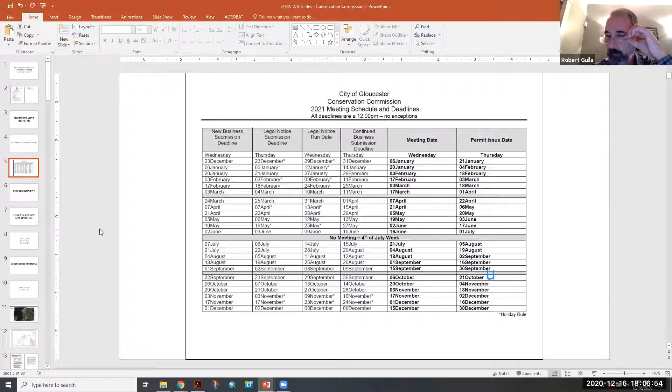Next is the public comment period, where people are welcome to speak on conservation issues not on tonight's agenda. If anyone wishes to speak, please raise your hand using the feature, or press star nine on the phone. There are 26 attendees tonight, but I don't see anyone raising their hand for public comment.

Seeing none, hearing none, I'll close the public comment period. Next up is our minutes review and approval. We haven't done this for a while, so we'll do these one at a time.

I've read the June 3rd minutes. Let's do a roll call for comments. Commissioner Charpentier: No comments. Commissioner Cook: No comments. Commissioner Gradwell: No comment. Co-Chairwoman Jackson: No comment. Co-Chairman Gulla: No comment. Very good, so Ann Joe, if you want to move that.

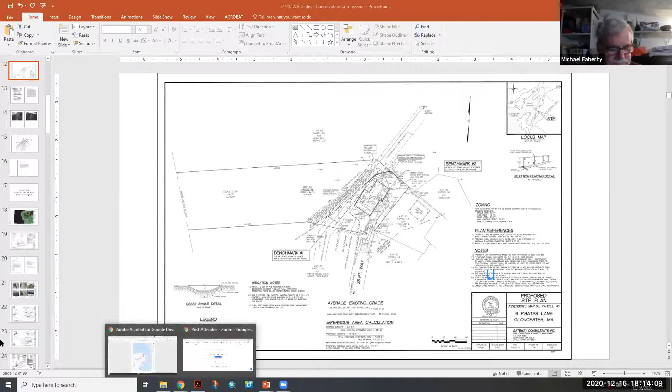Okay, next up, Notice of Intent 28-2708, 125 Eastern Point Boulevard. Grant being the applicant, I believe, with Vaclav from Hancock Associates representing.

You're muted, sir. Still muted.

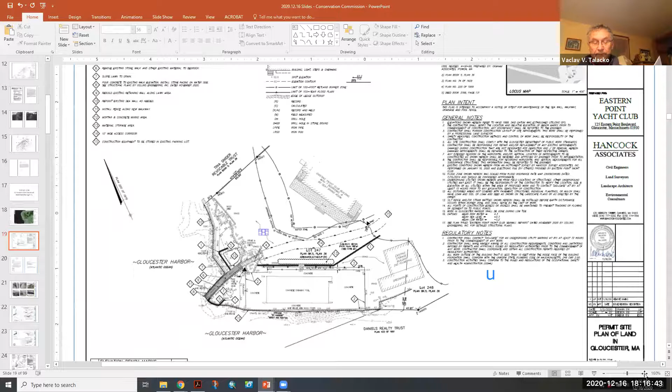We also show an area where there will be storage, basically north of the existing pool. That's where the storage will be. We're also proposing that the mortar will be mixed where it says number 12. There's a diamond with number 12. That's where the mortar will be mixed.

That mortar will be used for repointing the seawalls. One of the biggest changes on this plan from a design point of view is that we will not put in any catch basins or discharges. We will basically continue the drainage the way it does currently. In other words, any splashover just drains off the land back into the ocean, just like it does anywhere there is a splashover along the coast.

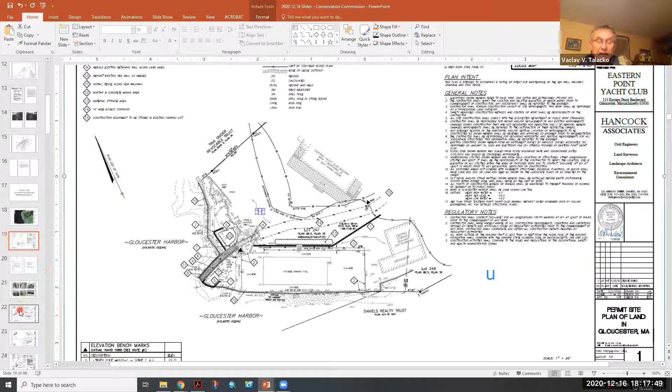And then we come to the structural plans. There are several sheets that show all the structural details. It starts out with notes, then there are some photographs. I'm not sure how many of you have gone out there, but it basically shows the area that's going to have most of the work done on, the heavy work.

Then there's another picture of the walkway toward the water, and a detail of the current anchor of the gangway. Any questions on those? Is that your complete presentation? No, it isn't. Well, most of us are making notes as we go, so you can just keep pushing through, I think.

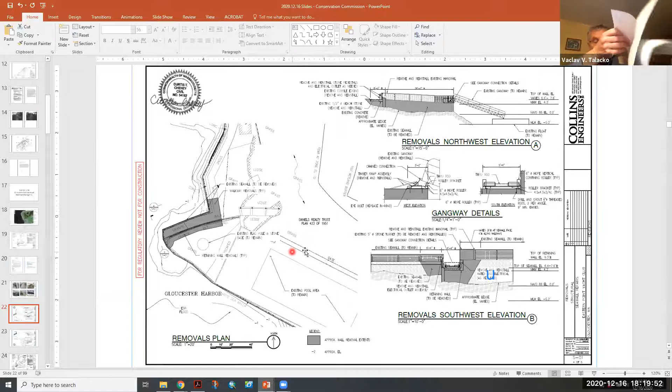Continuing on, there is the repair plan, what's going to be put in, which is basically essentially the same as what is there now. Then there are details of the crushed stone and the seawall locations, with a couple of sections to illustrate how it's going to be done, how the walls will be replaced and the walls that hold back the lawn area will be constructed on concrete footings and then stone walls. As you can see, the walls are essentially concrete and then have a stone facing.

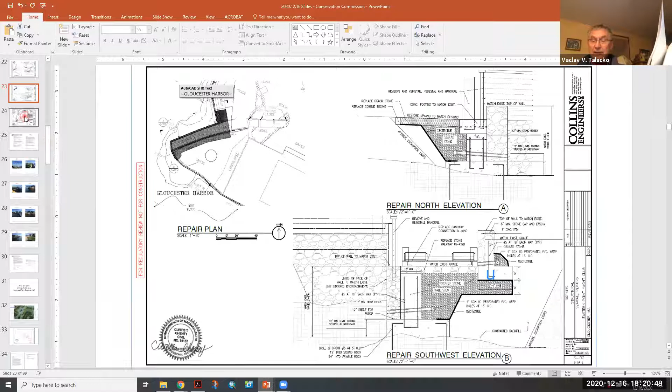Understood. And then the final, that's it. I guess I have another copy of our plan at the end. Right, then the sequence.

So there are basically two main tasks here. One is the walkway and gangway anchor, which has about 8 or 9 items for how it's going to be done. There's of course mobilization.

Then there's going to have to be a meeting with Adrian for a pre-construction walkthrough to discuss in the field that everything is ready. Then they will remove the topsoil and prepare the staging area, remove the existing walkway to bedrock, install new gangway anchor and seawall, and address any underground infrastructure, which is hardly any except a drain behind the seawall in one of the retaining walls. Then backfill and grade everything, remove and spread loam and seed in the lawn areas, and install concrete walkway.

Demobilize and clean up. Then, of course, there is the seawall repair, where I showed where it's going to be staged. The mortar will be mixed and prepared and transported by bucket to workers on the seawall during repairs. I think it's fairly straightforward.

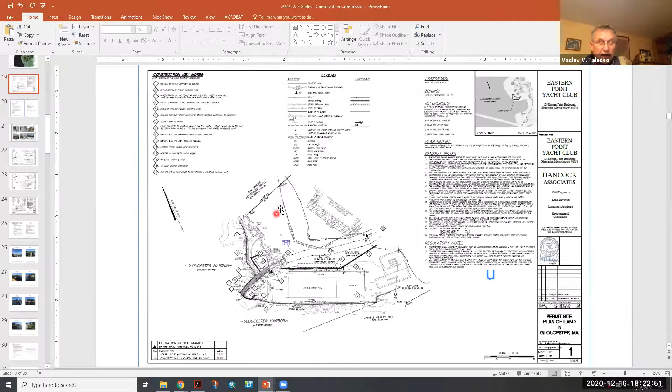You can see that we propose to put in some erosion barriers around the mixing area and along the uphill of the seawall that holds off the lawn, and in the other lawn area near the flag. The final erosion control area is along the fence of the pool where the mixing and storage of material will be, and also to protect from any runoff from construction equipment running up and down the access road.

That is the end of my presentation.

Thank you, sir. I guess off the top, my first question would be, what areas would you say the work is going to be dictated by tides? Or is all this going to be able to be done between tides? I think the removal will be somewhat dictated by tides.

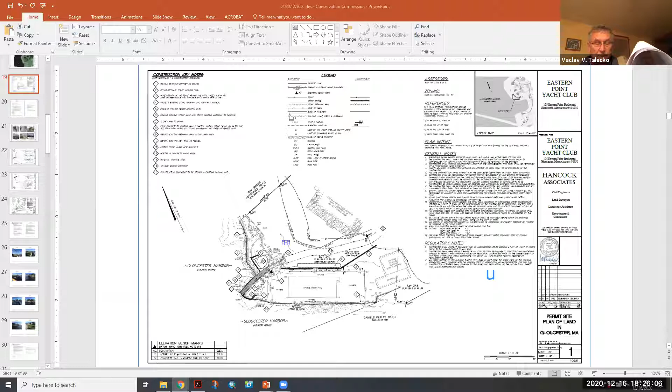I see your point, and I definitely think there is some value in the idea of at least a tide restriction, and maybe even a time of year restriction, just because of the location of the yacht club. It's a really sensitive area. I'm just looking at this quickly - it's a 15-foot elevation for the flood, and that is the entirety of the 100-year floodplain. But we're also coming into winter, so we're not going to do it this winter.

We're not going to do it this winter. I think the commission should consider setting a timeline around when it might be most appropriate to do that work, in fair weather and low tides. That's the idea - I wish Cara was here. I'm not totally opposed to the idea of considering a boom too, because when you talk about gravel and things traveling into the resource area, that is exactly what we're trying to avoid here - erosion and sedimentation into the resource area.

So, point taken, Chairman Gullah, and I do think there are some things the commission can try to do to be preventative and careful about how the seawall work is done in this particular location.

Why don't you do roll call comments for the rest of the commission and see if they have anything to add? Commissioner Charpentier, my only comment is I don't agree with the boom.

Again, if there were going to be oil and floatables, as just said, if it's going to be floatables, that's my only comment. I think the project is pretty well laid out.

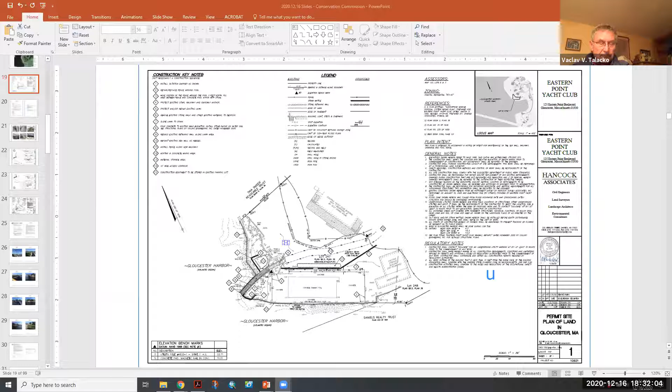I don't know if you want to continue to review next meeting concepts for protection. One thing, Rob, I'd like to point out, now that sequence starts right after Adrian does her walkthrough. So perhaps with our concern about the weather and that, if Adrian can flip that...

Keep an eye on the weather, then we can control when that work's going to take place. I mean, they can give it to us in broad strokes, approximately when they want to do it, but they can't start it until she does her walkthrough. And if we've got heavy rains, or the forecast isn't looking too good, then she doesn't have to give them the go ahead.

If I can, could I just say something? I think maybe what we need to do is hear from the applicant for this phase of the project, from start to finish. Is this going to be a 3-day project, a 2-week project, assuming you're working all day long? So maybe the whole thing about a storm could be moot. People are not going to plan projects like this in the midst of storms. So maybe we should get that information and see how that factors into these concerns.

Now, we talked about it somewhat, and Carter Roberts thought that you probably need 1 day to mobilize, which means basically put in the access road. And of course, the access road is really something that could contribute some runoff and some silt. That's why we have that long barrier there, plus beyond that is a fence and a pool, so there is basically quite a bit of protection from that.

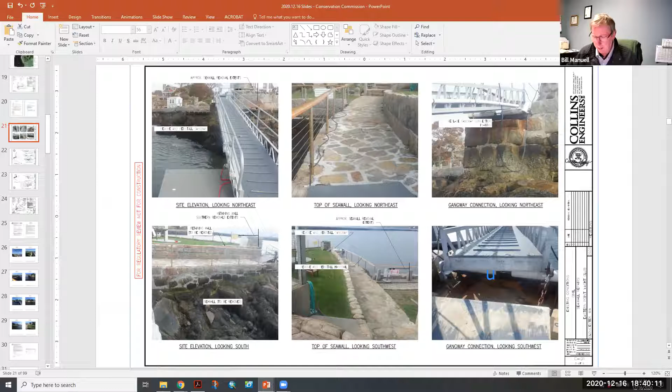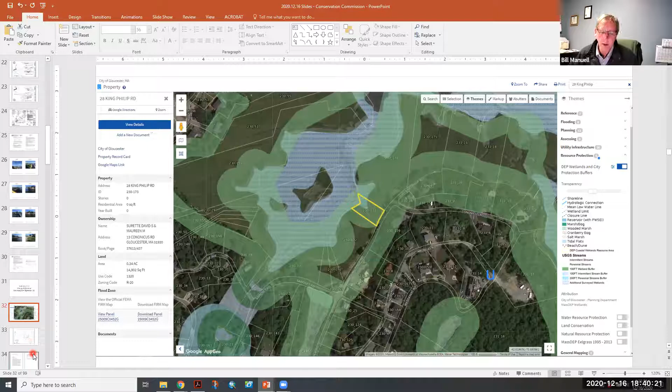Good evening, Bill Manuell, Wetlands and Land Management, Danvers, Mass. I just want to pick up from where we left off at the last meeting. First of all, we convened a site walk with the Shellfish Constable, and we corrected a lot of misinformation that he had heard and received from various sources. We were able to have a very good, productive meeting with the Shellfish Constable on site.

As a result of that, we tweaked the plan just a little bit. We have clarified the length of the pier — there was a small discrepancy between my narrative and the plan. The pier is now 66.5 feet long, and there will be a set of steps at the King Philip Road edge to get up to the height of the pier.

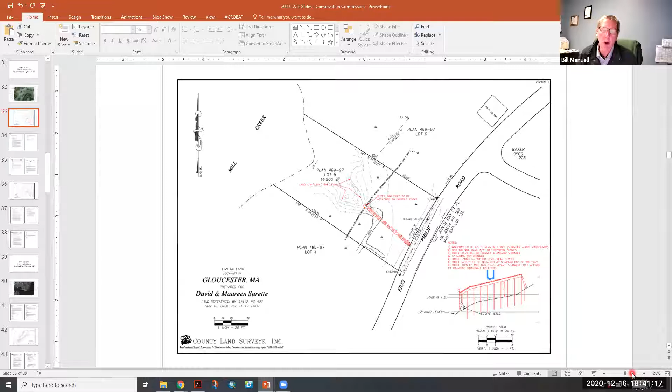You can see out at the very end, at the seaward side, we pulled the outer two piles back so that they now rest on boulders that are on a stone wall crossing the marsh at that point. Those will be bolted onto existing boulders.

So we've pulled everything out of the land containing shellfish. Beyond that wall is really where the mud flat starts, and Mr. Seminaro indicated that's where his jurisdiction was, at the mud flat. So we've pulled everything back — it will cantilever over 3 feet or so, but nothing touches the mud flat.

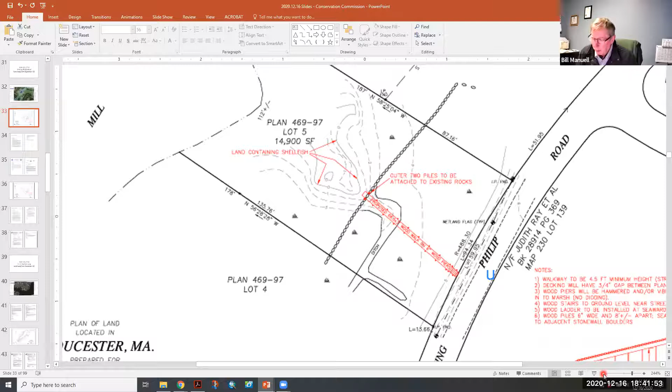We also clarified to him, as we put out at the first meeting, that this is to launch kayaks and paddle boards. The Shellfish Constable heard from sources that there was going to be a dock here with boats tied up, and that's simply not true and never was the case.

Based on that information, he was able to issue a follow-up letter to his initial comments, basically reiterating what I had just told you — that the work as it's designed now is out of his jurisdiction. You can see in the last paragraph he says, 'I do not foresee an impact to shellfish resource area with the amended project.' We thought that was very good progress.

We also submitted this revised information to Division of Marine Fisheries, and Kate Frew was nice enough to review it again and issue a follow-up letter to her initial comments. Her comments were that Corps of Engineers standards like to have a 1-to-1 height-to-width ratio — that's the width of the pier in relation to the height above the marsh — and lately DMF has been suggesting a 1.5-to-1 height-to-width ratio is more advantageous. We were able to easily accommodate that.

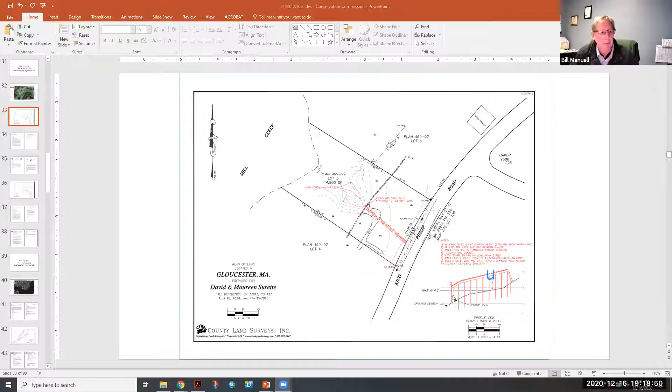Notice of intent 28-2736, 11 to 13 Harbor Loop, Senecal, applicant John Dick of Hancock Associates, applicant representative.

Co-Chairman Gullah: I did receive an email from the applicant's representative about 5 minutes before the meeting stating they still have not heard anything back from the 401 water quality cert and Army Corps of Engineers process, and are working through that.

So please continue to January 6th. Okay, and Joe, you want to move that? Commissioner Jackson moves to continue the project for NOI 0282736, 11 to 13 Harbor Loop, to the meeting of January 6, 2021. Charpentier seconds.

Roll call: Commissioner Charpentier, yes. Commissioner Cook, yes. Commissioner Gradwell, yes. Co-Chairwoman Jackson, yes. Co-Chairman Gullah, yes. Thank you.

Next up, notice of intent 28-2739, 330 Concord Street, Gloucester DPW, Lucas Perkins at Bayside Engineering representing.

Good evening. Please state your name and address for the record. My name is Lucas Perkins, Bayside Engineering, representing the city of Gloucester for NOI 28-2739.

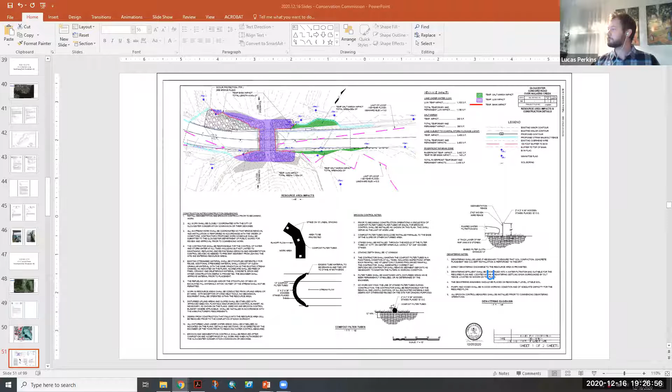Next up, notice of intent 28-2741, 12 Ocean Highlands, Rappa, Wayne Losey applicant's representative, listed as Wayne Losey as the applicant's representative.

Co-Chairman Gullah, I do not see any representative for 12 Ocean Highlands among the panelists tonight. Mr. Losey did receive a panelist invitation at the same time that the rest of the group did. If you're an attendee viewing the project and you're representing the applicant now, please feel free to raise your hand and I will promote you to panelist.

As an update to the commission, after our discussion at the previous hearing, there has been no further submission from the applicant or their representative with respect to a new engineering plan or any explanation of what the proposed work is going to be. There was a question into the conservation office from, I believe, the abutters about whether a site visit had taken place yet. The answer is no, site visits have not been scheduled. We are waiting to see what the proposed plan is so that we can actually evaluate it. I'll add that the DEP did post significant technical comments describing that it does not meet the performance standards of 310 CMR 10.30(3) through (8)—those are for Coastal Bank. The DEP does not agree with the Coastal Bank delineation, and significantly more information needs to be provided to them.

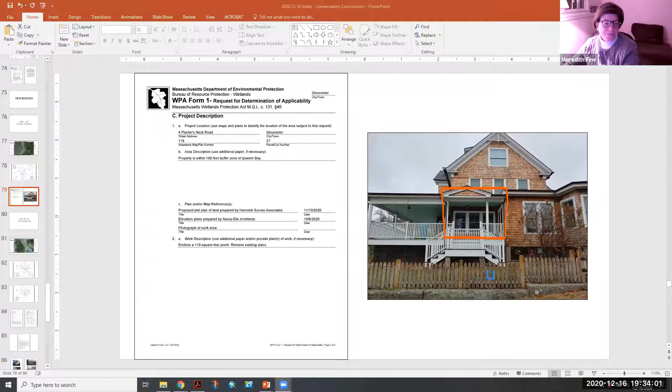Next up is NOI 0282747 at 32 Riverside Road. Taylor representing Taylor. And we're opening up the hearing.

Mr. Taylor, are you available? Yes, you are, and you're unmuted. Excellent. Name and address for the record and a brief description of the project, please. Thank you. Robert Taylor, 32 Riverside Road in Gloucester.

As indicated, I'm both the owner and the applicant of this notice of intent. Just to give you a little background on the property: this is a single family home with a 16,000 square foot lot with frontage on the Mill River. A large part of the property is within the 100-foot buffer, with maybe the upper driveway area and the front lawn the only parts excluding that boundary.

But the entire property is in the 200-foot riverfront area. It's a relatively sloped lot. From the street there's a gradual slope, but as it gets down towards the home and all the way down to the waterfront, the grade increases significantly.

My family has owned this property for the better part of 70 years. I'm the third generation owner. For the last 35 years, this property has been largely used as a summer residence. About a year ago, my wife and I made this our permanent residence, and now that we're living here, there are a number of longstanding issues with the house and property that need improvements.

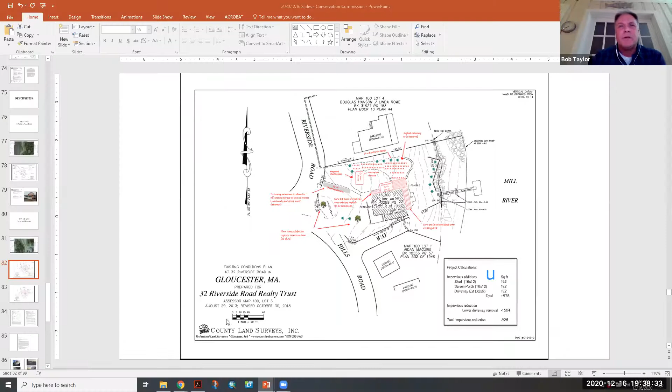Adrian, if you could expand and zoom in a little bit, that might help us see more of the things I want to describe. Yeah, perfect, that's much better. Thank you.

Looking at the first floor accessible decks on the east side, or Mill River facing side of the property, we are proposing a first floor accessible deck that will wrap around to the north side of the property. This will be built over a current ground floor accessible deck on the east facing part, where a wooden deck extends out beyond that. The length of this east facing deck will match the underlying current wooden deck at ground level, but it won't be as deep, allowing us to continue using portions of the lower deck as it exists today.

The deck will wrap around to the north side of the property, where the deck space will expand greatly. We'll add a screened-in 12 by 16 porch and a continuation of the deck that will allow access to the whole deck space from the front lawn area and the driveway area. The area underneath these north side structures is a roughly 5 to 6 foot asphalt walkway that starts from the driveway and goes down through the north side of the house to the end of the driveway. In addition to removing the large driveway area, we'll also remove this asphalt surface underneath these north side deck and porch structures.

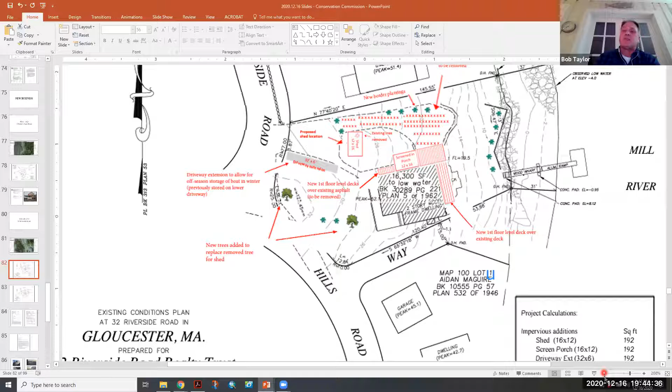The last thing I wanted to point out—Adrian, if you could scroll down a bit so we can see the project calculations at the very bottom of the presentation.

With the addition of the shed, the screen porch, and the driveway extension, that brings us to a total of 576 square feet of new impervious additions. With the removal of the driveway and asphalt areas, we're removing 1,504 square feet of pavement, giving us a total impervious reduction of 928 square feet.

That concludes my presentation to the board.

Great, thank you very much, Mr. Taylor. I'm going to open this project up for public comment. Is there anybody in the audience who wishes to comment on the project for NOI 0282747 at 32 Riverside Road?

There are no members of the public to comment at this time. Okay, then I will close the public comment period.

Adrian, do you have any concerns about this project? Well, I don't necessarily have concerns about the project. It is very much mostly a deck project and plantings.

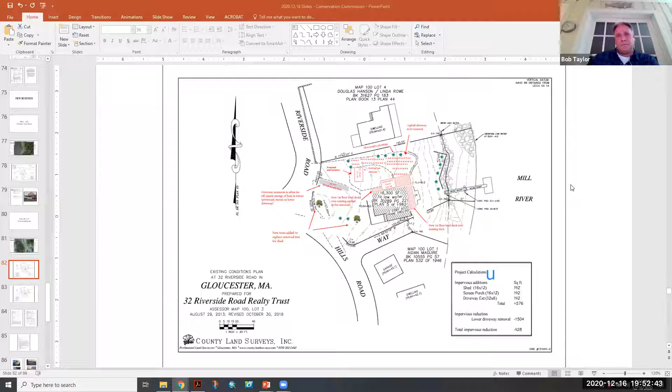Is he here? He's here. Thank you, Mr. Excellent, Taylor. Have a good night.

So I don't know if Mr. Judd got back. Do we know? I do not see John Jett on the panel. You want to move to— We can continue going. If he does not appear, okay, he'll appear. So let's move on to notice of intent 28-2746, 132R Wingaersheek Road, Pell et al.

Bill Manuell of Wetlands and Land Management representing. Good evening, this is Bill Manuell, Wetlands and Land Management in Danvers. And Alice Pell is logged on as a participant tonight.

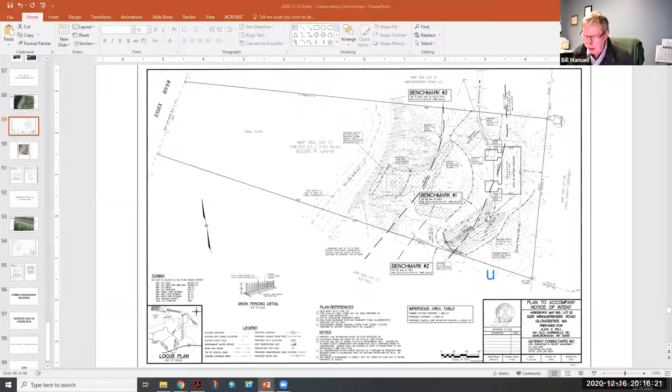The commission issued an order of conditions this spring to do a renovation of the home and construct a small addition at the ground level. The owners have now had time to consider what their needs are for living there permanently, having family visit, maybe stay over, and they're realizing they need a little bit more space. So rather than sprawl out on the lot, they chose to add a second floor. We have to amend the order of conditions to reflect that.

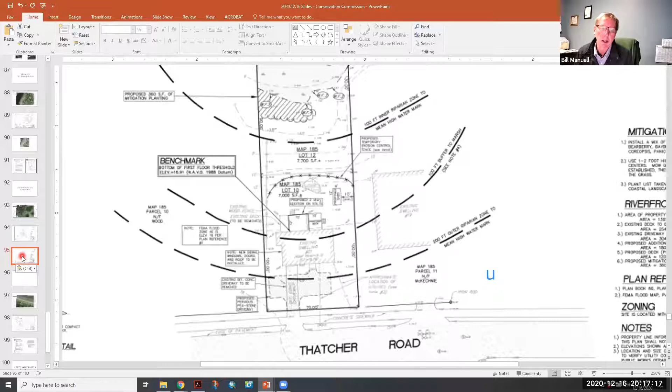We didn't want to come in with a certificate of compliance showing a 2-story home when you only approved a 1-story small addition. This is also in riverfront area. Obviously the best alternative for a change in scope like this is to go up on the foundation instead of out, and so that is what our alternative exploration was. If you need to make a motion on that, that would be appreciated. But that's basically all I have to say, is that we're within the work area, we're on the same footprint, we're just going up a story.

Okay, so you're not doing the addition at all, you're just going up? No, we are doing the addition as well as going up. Okay. Yep, that's approved. Yep, no, I hear you. Okay, you made it seem like it was and/or. I get you, I just wanted to make sure.

Okay, let's open up for public comment. See if anybody in the public wishes to speak for or against the project at 21 Thatcher. You can raise your hand, or *9 if you're on a phone. No comments at this time.

Moving on then, why don't we do roll call commissioner comments. Commissioner Charpentier, no comments. Commissioner Cook, no comments. Commissioner Gradwell, no comment. Co-Chairwoman Jackson: my only comment is, does this require an alternatives analysis? Another one? I don't know, I don't think so. Okay, good, I did mention it in my narrative that it is in riverfront, and this would be the best alternative. Yes, you did. Yeah, you can vote on it, I suppose. Okay. Co-Chairman Gullah, yes.

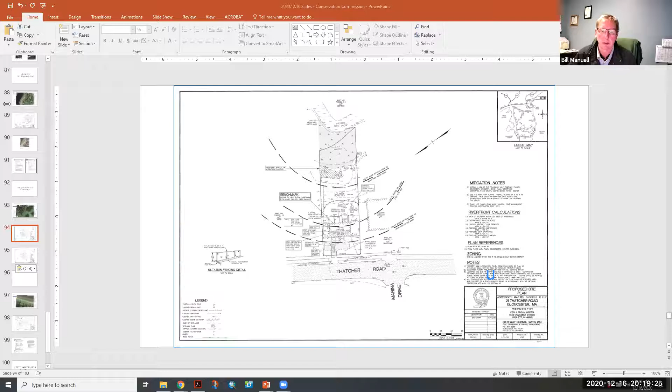Would you like me to move to accept the alternatives analysis? I thought we didn't have to, but yes, please do. Commissioner Jackson moves to accept the alternatives analysis for the amendment 0282712 at 21 Thatcher Road. Charpentier seconds. Roll call vote: Commissioner Charpentier, yes. Commissioner Cook, yes. Commissioner Gradwell, yes. Co-Chairwoman Jackson, yes. Co-Chairman Gullah, yes.

Thanks, so now let's move to accept the amendment. We need to close it here. Is this a public hearing? Yes, because we did open up. Commissioner Jackson moves to close the public hearing for amendment 0282712 at 21 Thatcher Road. Charpentier seconds. Roll call vote: Commissioner Charpentier, yes. Commissioner Cook, yes. Commissioner Gradwell, yes. Co-Chairwoman Jackson, yes. Co-Chairman Gullah, yes. Thank you. And Commissioner Jackson moves to approve the amendment

0282712 at 21 Thatcher Road.

Roll call vote: Commissioner Charpentier, yes. Commissioner Cook, yes. Commissioner Gradwell, yes. Co-Chairwoman Jackson, yes. Co-Chairman Gullah, yes.

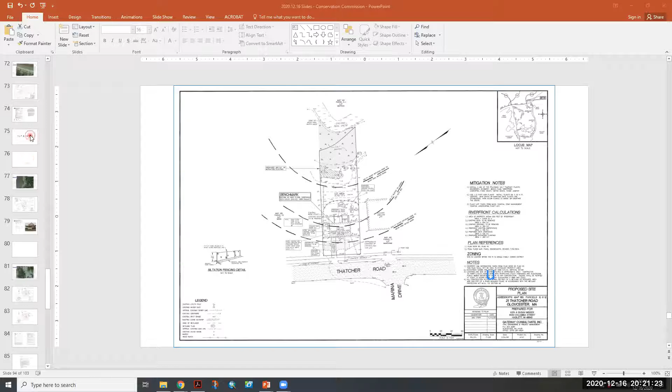Thank you, Mr. Chairman, members of the commission. For the record, John Judd, engineer with Gateway Consultants. Just to refresh your memory, we were in front of the commission on December 2nd for this proposed project.

This is an addition with an above-ground pool and decking at Thatcher Road. At that time we were waiting for the final file number from DEP, which we've since received. There were questions about the drainage and some other comments, and the abutters had spoken with some concerns as well, which I believe we addressed at that time.

I want to update you on what's been done to the plan and what changes were made. As requested by the city engineer, we included a test pit for the proposed rain garden that will accommodate the roof runoff from this addition. That would not only deal with the runoff but also add additional mitigation plantings.

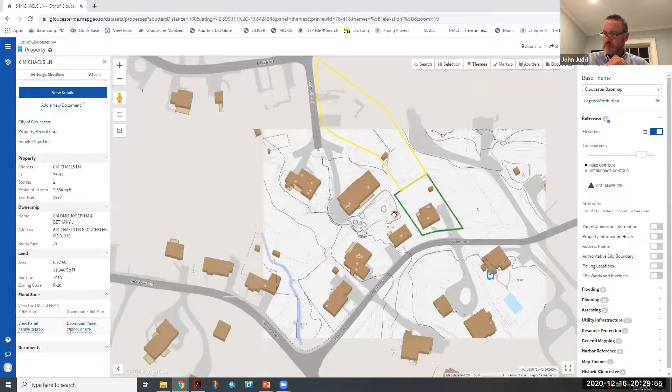So I'm just concerned that it might impact my basement — I have a dry basement. I just want these things to be looked at. It also comes through the Calomos, the 5 and 6 Michaels Lane, and takes a corner over my property, and then ends up going out to the ocean. I just get concerned if there isn't enough buffer there, and losing that, saturation within the property could pose a problem to me and my neighbors. So I just would ask that you would take consideration of that. Thank you.

Okay, so commissioners, we have a project before us. I know the neighbors seem to be a bit concerned. My only, obviously when we get a project, our focus is mainly on the actual project. I don't know how, maybe the applicant's representative can explain — my only concern would be the roof runoff and the volume of roof runoff. Could that in any way discharge? Is it being recharged into the ground? And if so, could that impact the wetland in any way? I guess I don't understand the stormwater management yet, if it's even required on this project.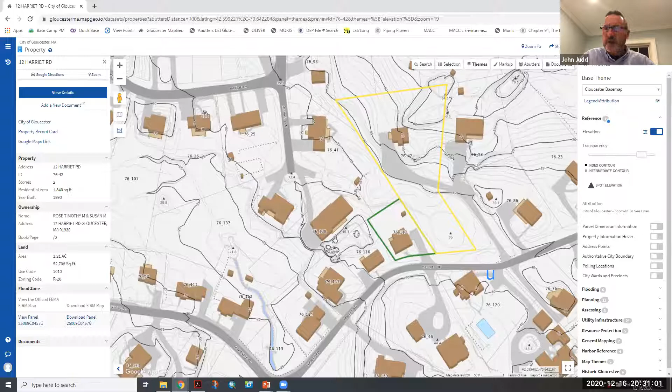Thank you, Mr. Chairman. Yes, we are required under the local stormwater ordinance to address the additional impervious area under the Gloucester Drainage Ordinance, which we handle with infiltration into the ground. As you know, all the wetlands, for the most part, are off the property. There is a pre-existing drainage issue in the neighborhood — I think everyone's well aware of that. Just driving down Harriet, right at the intersection with Grapevine, you used to have ponding in the road there. So there's an existing situation, and it's our responsibility not to increase or exacerbate the flooding issues that take place there.

So what we're doing is recharging this rainfall that comes off the proposed roof into the ground, so we don't have additional peak rates of runoff during storm events. That's our responsibility as part of the ordinance. Obviously, when it rains, it's going to rain whether it's on lawn or on a roof — it's going to rain the same amount. But it's our responsibility that the peak rate of runoff does not increase between existing and proposed conditions.

With the addition of over 150% of mitigation planting, as well as the rain garden, that will actually improve the situation with the additional planting. Right now that's all lawn, which has a higher runoff coefficient than vegetation with shrubs. So that's a twofold improvement with the mitigation that creates a buffer to the wetland area, which is all off-site, in addition to the runoff curve coefficient associated with shrubs as opposed to lawn. So again, we're not making it worse is the idea.

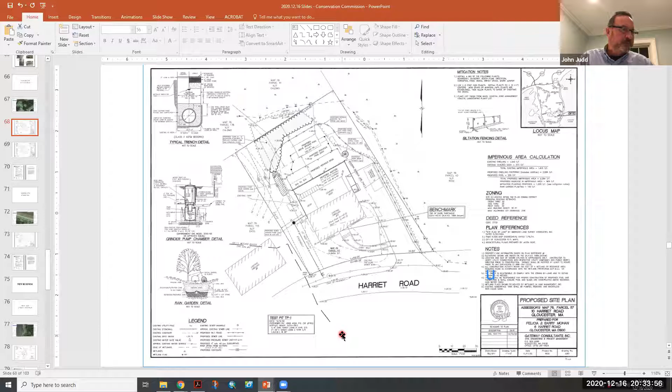That's it. Commissioner Cook, no comments. Commissioner Gradwell?

We hear you, Barry. Looks like he froze. Okay, let's go with no.

Co-chairwoman Jackson, no comment. And co-chairman Gullo.

I do have two comments. Basically, this is similar to one of the earlier projects tonight. I don't like it, I see where there could be some problems, but when it comes to permitting and the Wetlands Protection Act, I think it meets all the criteria. It's one of those projects where the neighbors need to do their due diligence, but we can't go over there and direct what may or may not happen to drainage on other properties. All we can really do is look at the project before us and see if it meets the level of the Wetlands Protection Act and its protections. Unfortunately, it's not a great situation. My hope is that this new drainage and planting will help alleviate some of the flooding problems, but again, I'm not an engineer. Otherwise, to me, it's one of those projects where I see the problems, but it's a permittable project.

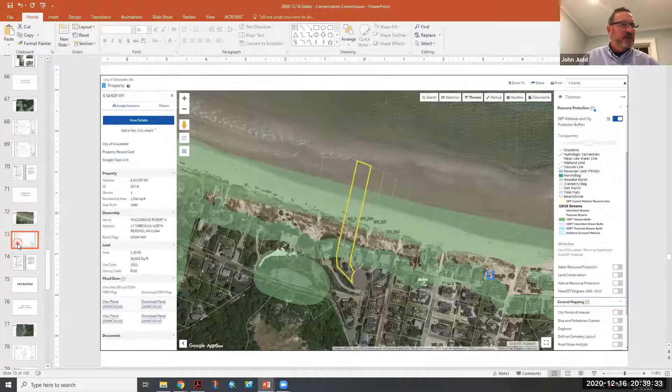Next up, notice of intent 0282744, 6 Sandy Way. Mucciarone, applicant, with John Judd of Gateway Consultants as representative. Thank you, Mr. Chairman. Once again, John Judd representing the Mucciarones, and this is another project where I believe the only outstanding item was the DEP file number, which has been posted by DEP with no comments that I saw. So we can answer any questions you might have for this proposed addition at 6 Sandy Way.

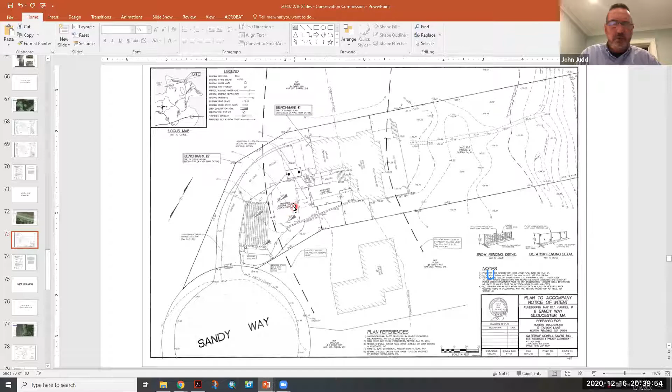So it was mostly a septic system upgrade, correct, in addition to the project? Yeah, it's an addition with a septic system upgrade. That's a passive sand filter that's been approved by the Board of Health, and the project has been approved by the city engineer as well.

Excellent. We'll open up for public comment. Does anybody in the public wish to speak for or against the project at 6 Sandy Way? You may do so by raising your hand or pressing star 9 if you're on a phone. No comments at this time.

Since we've already reviewed this project, let's move to commissioner comments. Roll call: Commissioner Charpentier, no comments. Commissioner Cook, no comments. Commissioner Gradwall, no comment. Co-Chairwoman Jackson, no comment. Co-Chair Mangala, no comment.

Let's close public comment and move to approve.

Commissioner Jackson moves to close the public hearing for NOI 0282744 at 6 Sandy Way. Charpentier seconds. Roll call vote: Commissioner Charpentier, yes. Commissioner Cook, yes. Commissioner Gradwall, yes. Co-Chairwoman Jackson, yes. Co-Chair Mangala, yes.

Just a brief discussion: I want to note that this was a betterment to the situation here, because the septic system was replaced with a much better one.

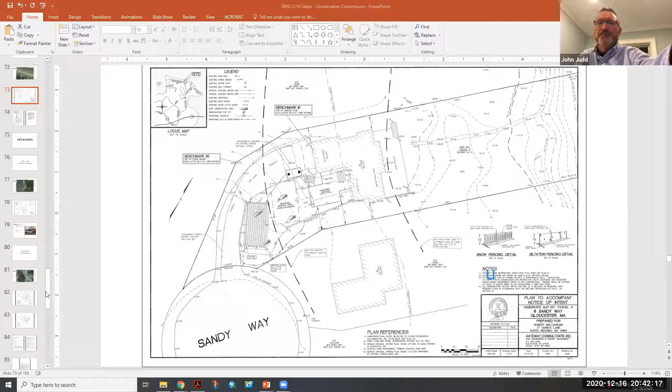And the last item on the agenda, certificate of compliance.

Mr. Mason, you stayed through it all. Yes, he's an Iron Man. Longevity, look at you. Is it bedtime already? Close. So what do we have?

This request for certificate of compliance at 96 Magnolia, I did swing by there. This is a project that actually attracted a lot of attention in permitting, and in the early stages of development. But now that it has come through the other side, it absolutely looks as per the plans and per the order of conditions. I don't have any questions or thoughts.

Excellent. Commissioner comments? Let's do roll call just to be safe. Comments on 96 Magnolia: Commissioner Charpentier, no comments. Commissioner Cook, no comments. Commissioner Gradwall, no comment. Co-Chairwoman Jackson, no comment. Co-Chair Mangala, no comments.

All right, this is consent permitting, there is no hearing, you just move to issue the certificate of compliance. Commissioner Jackson moves to issue a certificate of compliance for 0282642, 96 Magnolia Avenue. Charpentier seconds. Roll call: Commissioner Charpentier, yes. Commissioner Cook, yes. Commissioner Gradwall, yes. Co-Chairwoman Jackson, yes. Co-Chair Mangala, yes. Thank you very much.